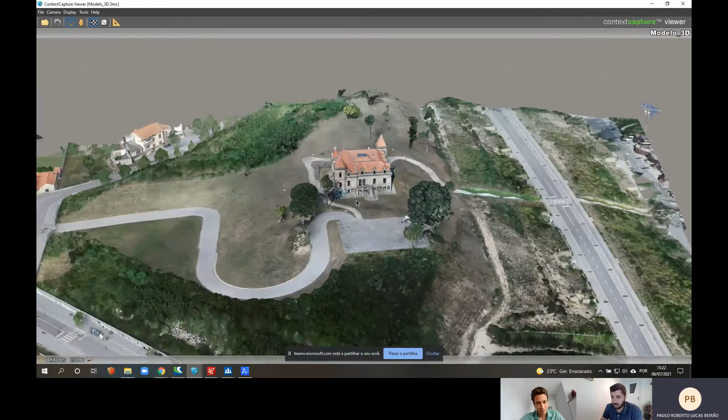Okay, now you see my monitor? Yeah, we can see it now. So this is Palácio de Gaia, right? This is the Palácio, yes. And where is this exactly in Portugal? It's at the south of Porto. Oh okay, nice area.

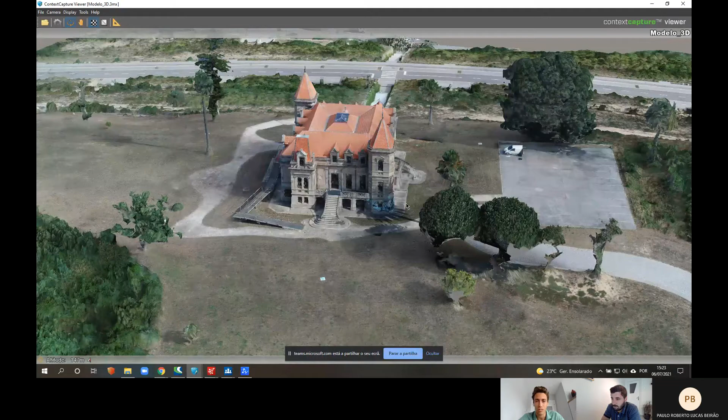We've been saying that the capturing process was really important and really hard to learn ourselves. What was the capturing process here? How did you apply it, and what resources did you use?

So here first I made an automatic flight with the drone of the entire area. I put here in the ground some control points, ground control points.

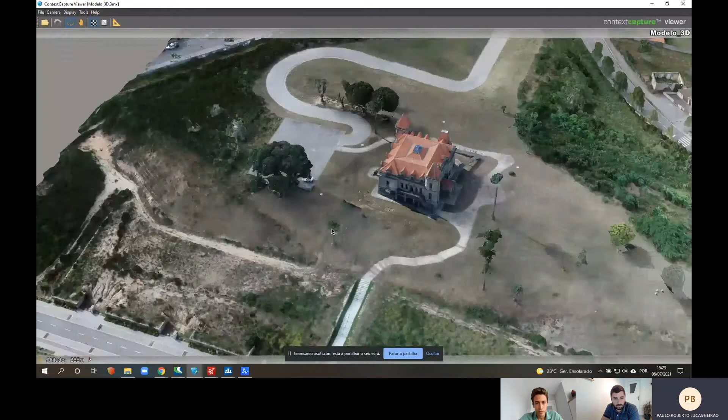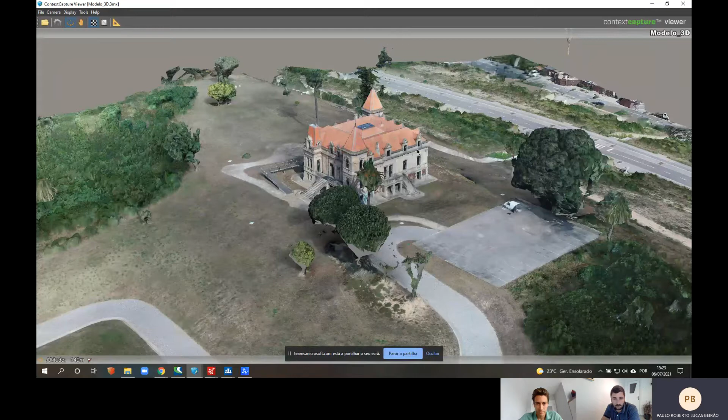So you use GPS technology to georeference this model? Yes, yes, GNSS, I use it to georeference this. So I made an automatic flight at 30 meters high.

And then I made some manual flights around the palace, to catch more details probably. And then I took more pictures from the ground with an iPad Pro, with a tablet.

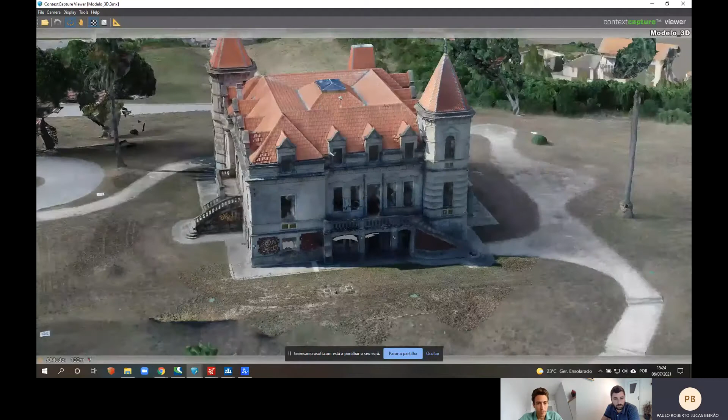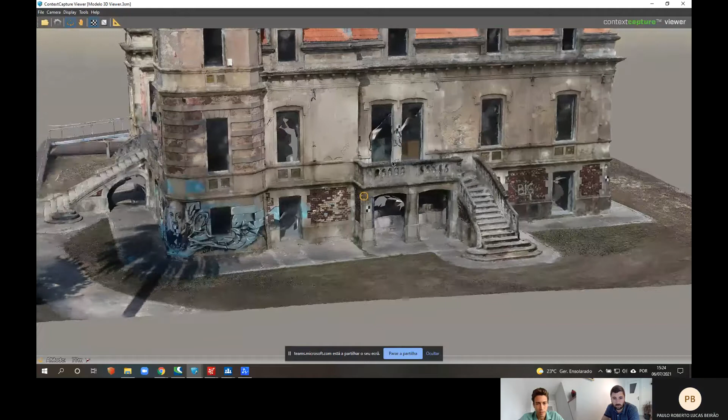Okay, so the outside was only with photography. And then I cut it and created this model. So this is the result of 3 different techniques: an automated flight, manual flight, and photographs from the ground using a tablet iPad, right? Yeah.

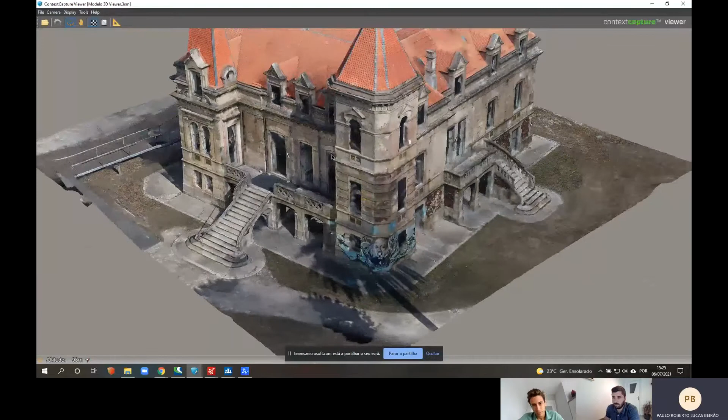We can see your precise technique, I can see many targets around the building, even on the walls. Well, in this model I don't use QR codes, I use only this normal target. I have here another one to georeference it, because then I use the laser scanner to measure the interior, the inside.

So to georeference the point cloud, I start from the outside and then go inside, measuring everything, and I can show you.

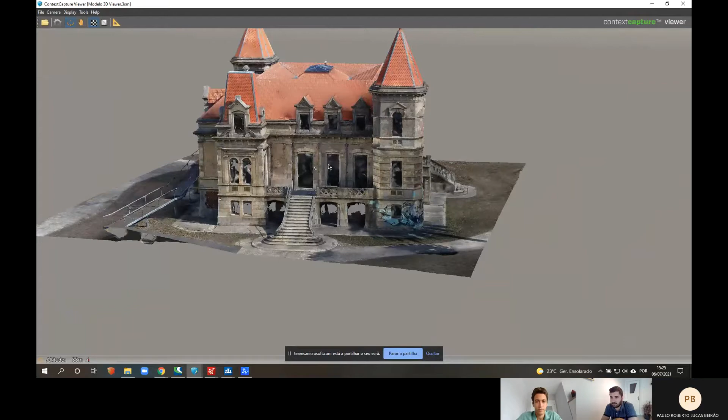So what was the purpose of this work? Was it for architecture, or can you show us the kind of deliverables? Yes, this was for an architecture project to become a hotel, and they want to preserve this aspect of the building, the facade of the building. Yes, they want to preserve it.

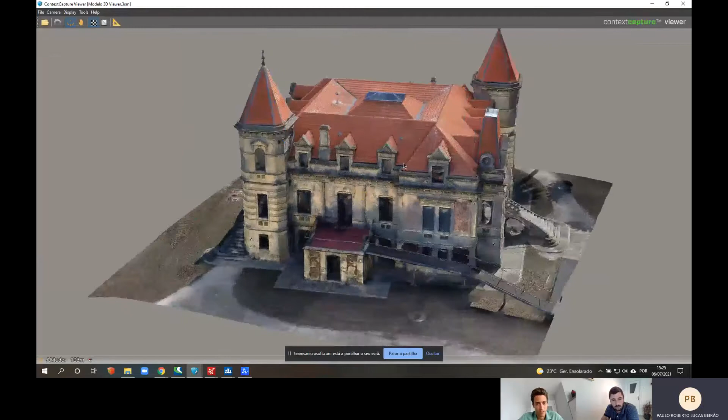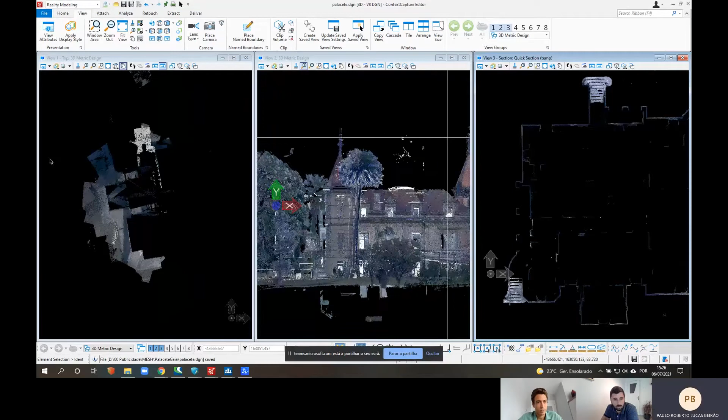So then I made the interior, yeah, I can show you right here in CC Editor. Okay, this is in ContextCapture Editor then, yeah.

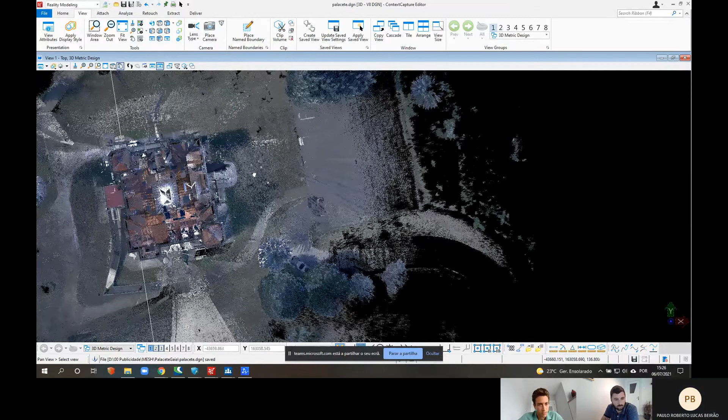So this is the point cloud. And then using the point cloud, you extracted the floor plans.

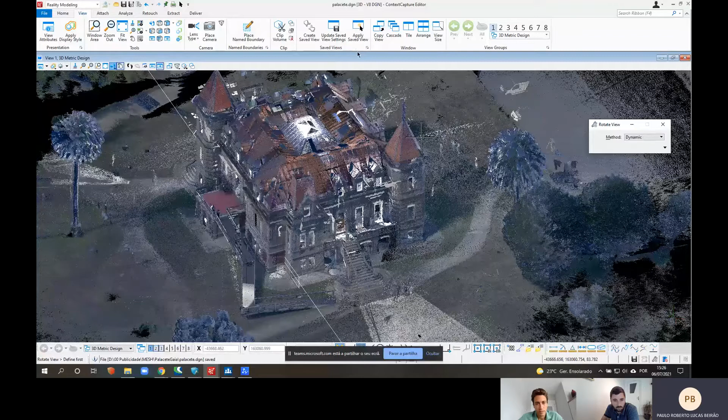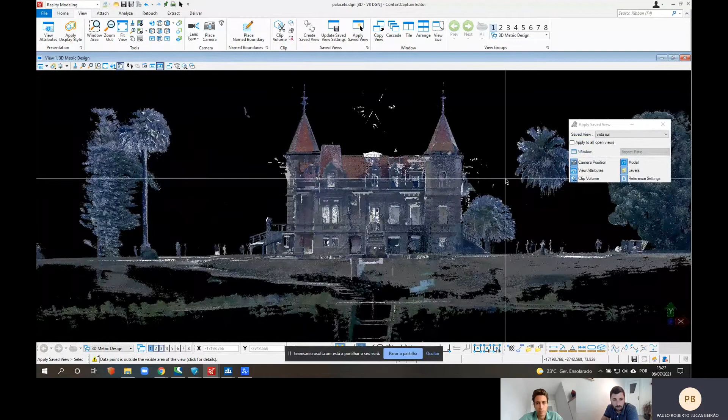I have here some saved views to show you, where we have combined as well the laser for inside. That's really good work. Then you can draw with RGB, the color, or with intensity. It depends on the person, some people like to draw with intensity.

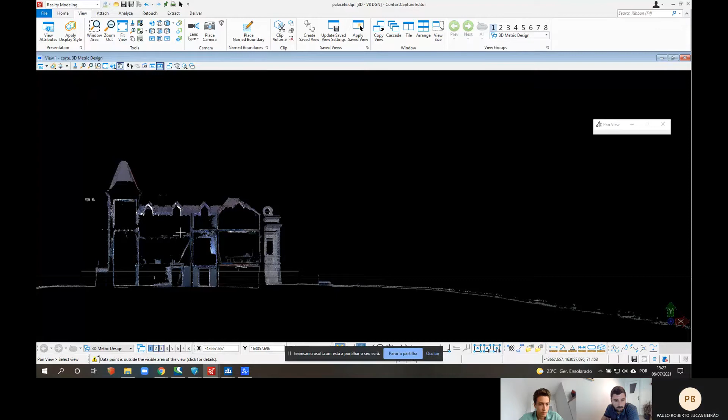So you used cross sections to draw not only the facades but also the interiors. Yes, for the plan, I can show you here. For example this, you have here the interior, with the sections, yeah, a section.

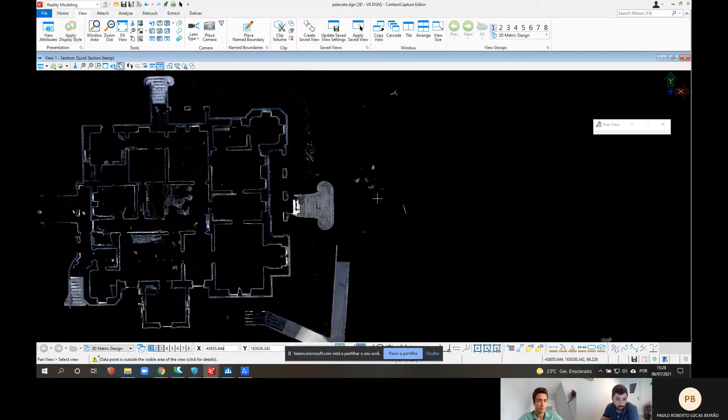And you can see it horizontally, for example like here. That's fantastic. So this is very useful for architects that need this kind of deliverables for their studies. It's really good to see the type of job that you are doing. You draw everything. Yeah, exactly.

And how long was the scanning process of the inside, do you remember? It doesn't look quite fast. Inside I took about 2 days, 2 entire days. All the job outside in the street, plus the inside, I took 5 days.

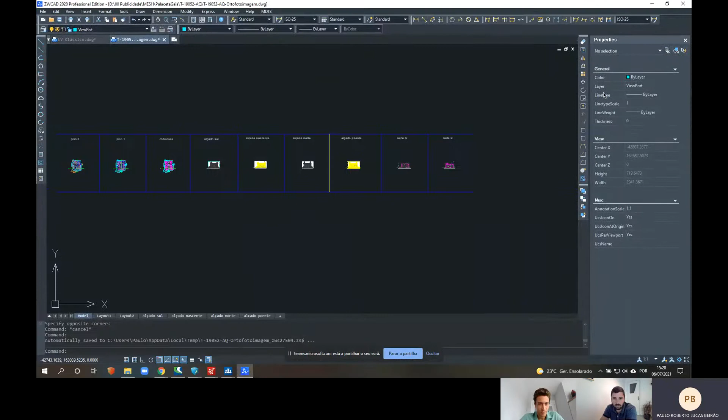And a few more days in the office, about 2 or 3 weeks drawing. Yeah, totally. And do you have the deliverables, can you show the final drawings? I can show you here, and then we give the deliverables in AutoCAD. Wow, okay, you can see this.

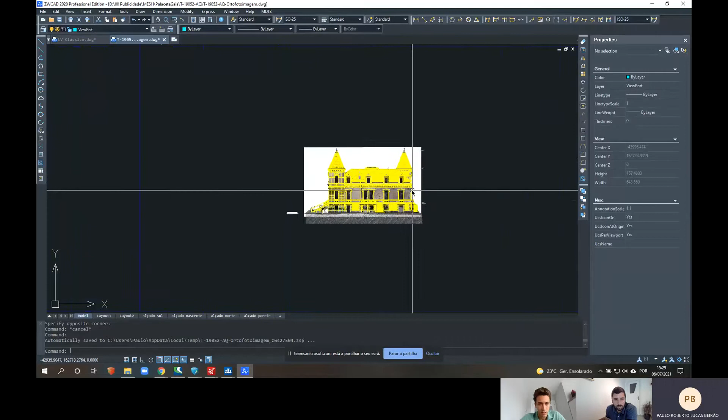Have the first floor, for example, the second one, the terrace. Then you have the outside walls, the facade. That's fantastic work. This is very detailed, we have the section here. See, it's gray here, to have the context, real context around it. You see the facade.

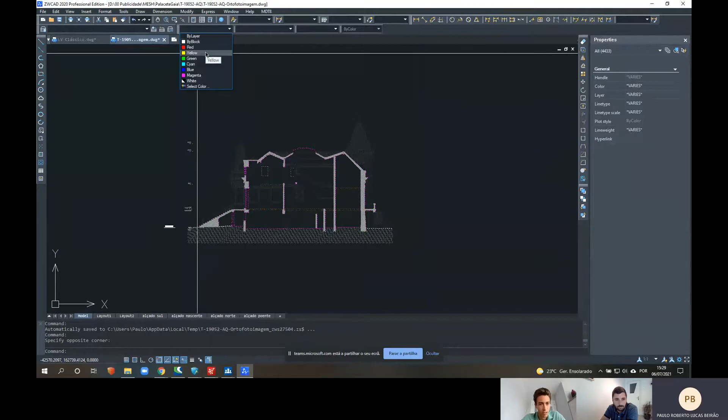The section and the other section, so you can produce every drawing. This is really valuable. Indeed, so I would say that with these drawings, all the planning stage for construction will be perfectly handleable from the architects and civil engineers, right? What do you think was the value or the advantages of doing it with this combination of photogrammetry and laser scanning rather than the traditional topography methods we are used to?

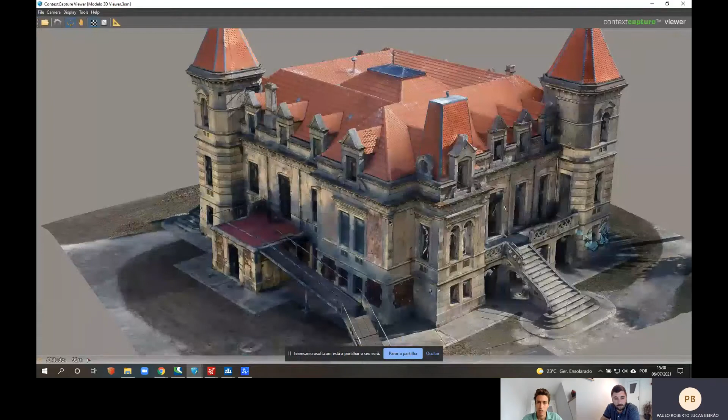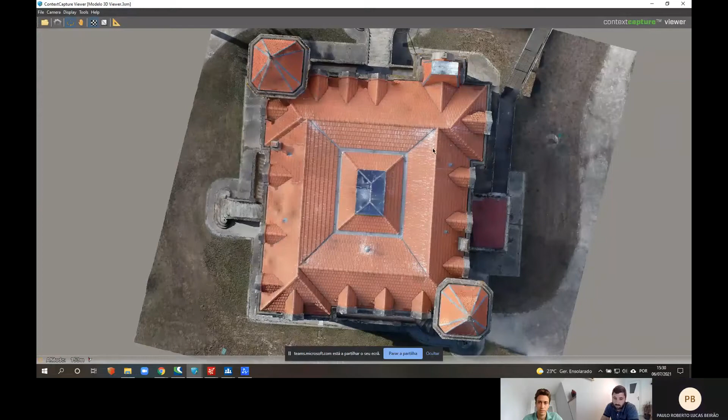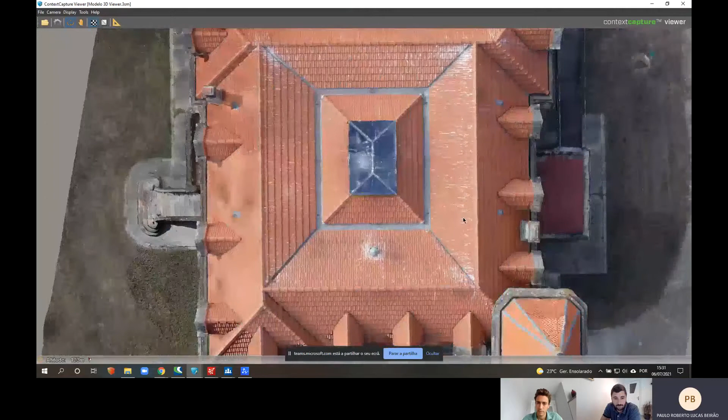Well, you have here, for example, with the traditional surveying, how do you draw these things? So all these details you could capture with the reality mesh. And I would say that in the field, instead of 4 or 5 days to collect all this data with a conventional topography survey, you would take at least 2 or 3 weeks or even more, right? Yes, and the work is not so good, because how do you measure this with the classic topography?

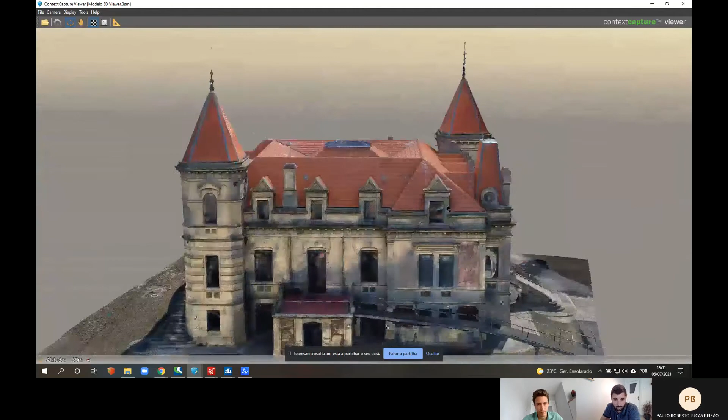So for you, this innovation of workflow in your company was very good, and you are now profiting and taking advantage of this new workflow. Yes, absolutely, that's a fantastic model. This is, I would say, the new way of surveying and capturing all these kinds of details, especially for heritage, where this type of detail is so big.

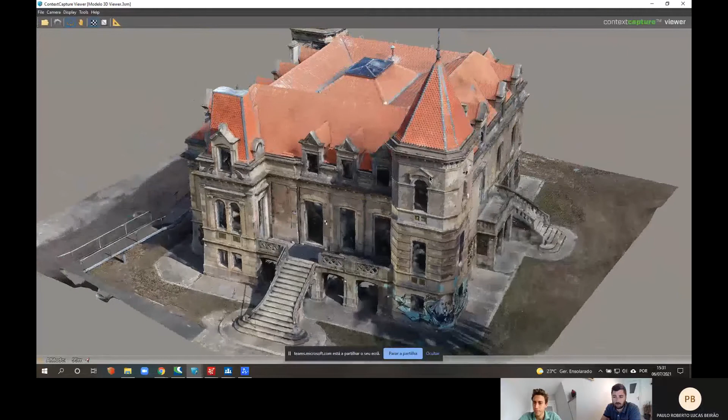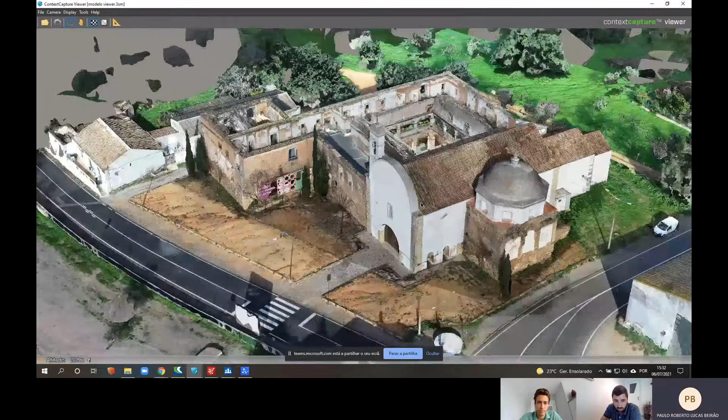Talking about the details, can you show us the other model? I think it's from a convent. And you could also tell us what kind of techniques you used in the field to capture this great model. The convent is this one here. I also made an automatic flight at 30 meters high, and then I made a manual flight also around and from the ground too with the iPad. So in the exterior, in the outside, I did the same technique.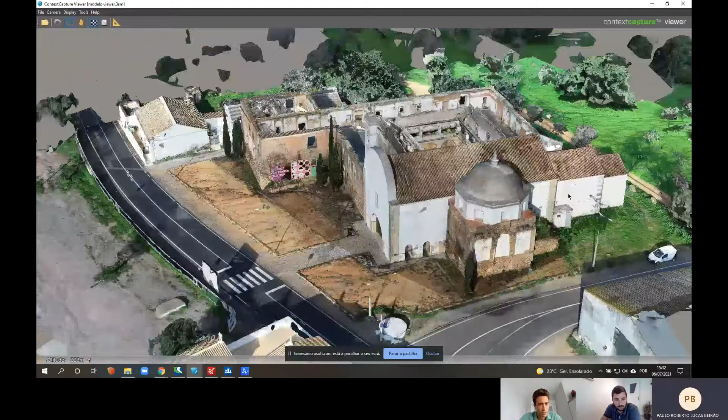I used the GNSS to georeference the model. The big difference here is that in the interior I started to use QR codes. Because first I made the outside in one 3D mesh, and then I made a second 3D mesh only of this part, so I had to merge those meshes to bring into a unique model. Yes, then I merged the two meshes and the QR codes helped me a lot.

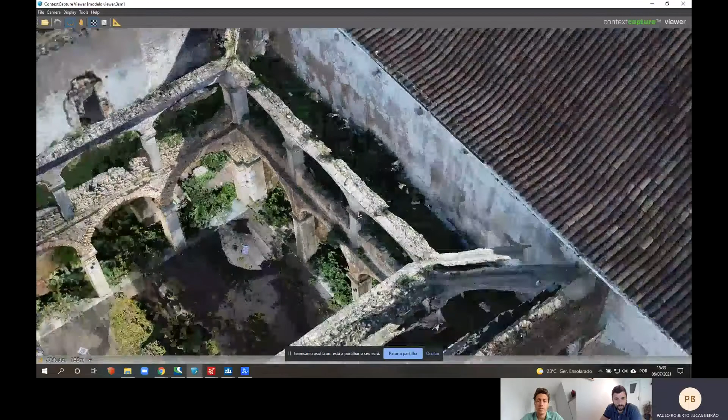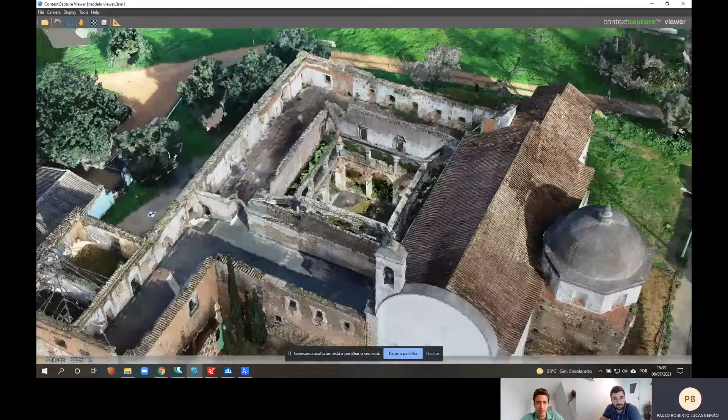Was it hard to combine them from multiple devices, did you use laser scan? No, here it's only photography, just combining the inside and outside with the QR codes. Was it hard? Yeah, a little bit. I took in total 1,200 photos of everything, and only inside here I have about 500, only inside of this part. And it was captured on the same day, or in different days?

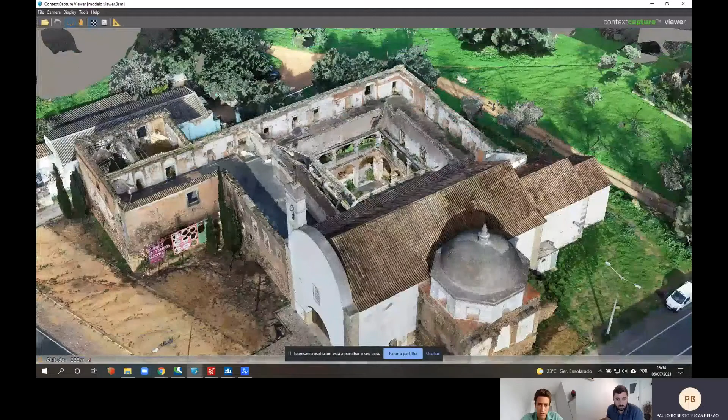We can maybe see a difference of sun, but it's not really noticeable. The outside I did in December, and this here I did in last March. Even so, we don't have a big difference, something that can be really noticeable here. So I think it was a really good merge between those models, the QR codes are really good.

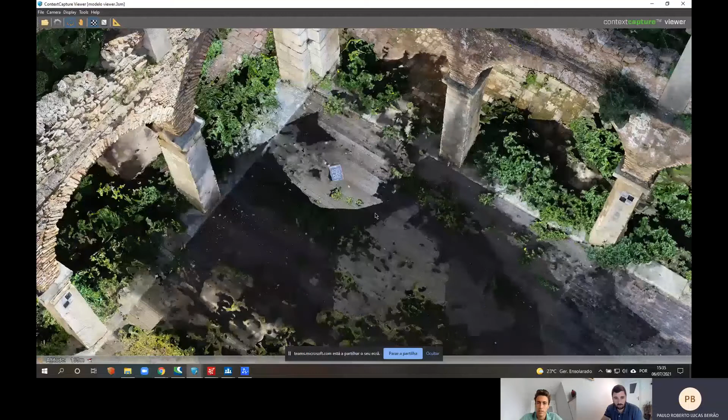So do you have to do it manually, merge them together in ContextCapture, both the inside and outside? Manually, only with this kind of targets, because of the QR codes. And then in ContextCapture you can specify which QR codes you want to use, because one is for tie points, others are for the axis X or Y, for scale, for example. You have many types of QR codes, and here I used it for scale, tie points, and axis constraints.

Good to know. And I don't know if this is a current project, what is the purpose of this job, of this project? Well, this job is to analyze the sequence of construction of this convent, for historical analysis, to analyze what happened since its foundation, because this kind of building passed through some earthquakes.

Later on, with the extinction of the religious order, this church was closed and sold to a leather factory. So they changed some things. They opened some doors in the wall, as you can see here. You can see some difference here. We can see where you have passed with the iPhone, probably, right?

Yeah. And you can see some difference here. So we study this kind of difference in the stones. You have an old door here, you see. Definitely. So the purpose is the history of the construction, destruction, and reconstruction of the building.

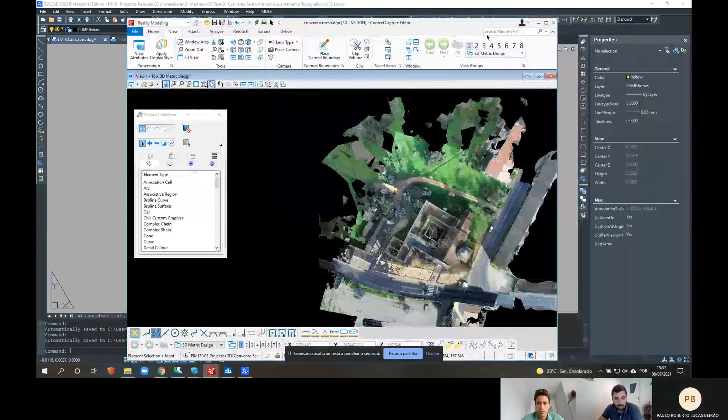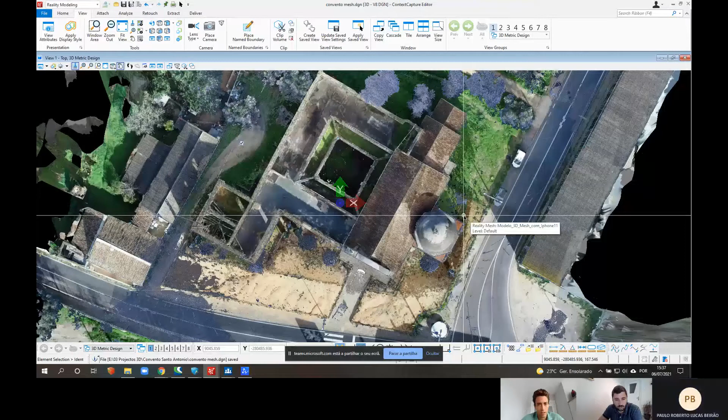in the editor, what can we make here? So here in editor, I have the 3D mesh and the point cloud. Oh, you used also a laser scanning device. Yes, because in some places here it's not possible with photography. So I made it with laser scanning.

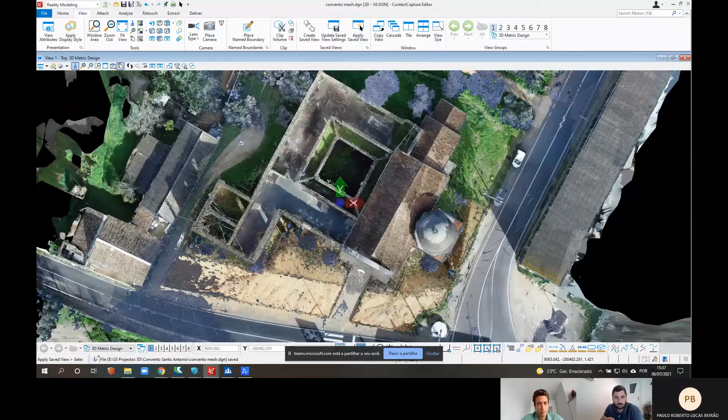And you used both point cloud and photography to create the 3D mesh. Yes. So I have here, for example... see? Okay, with sections, yeah. And the interior here. Okay, you see here? This is the point cloud inside the building.

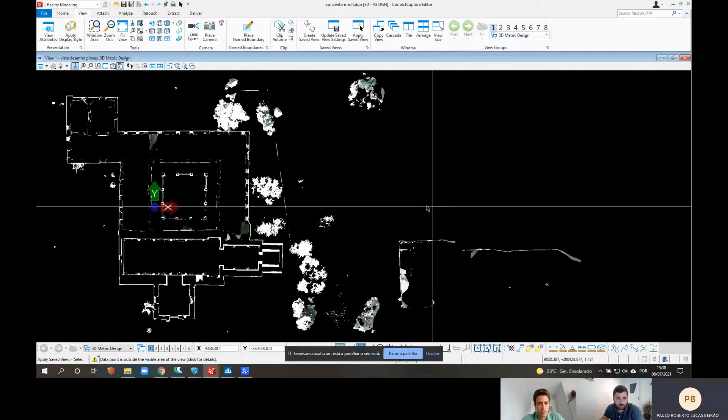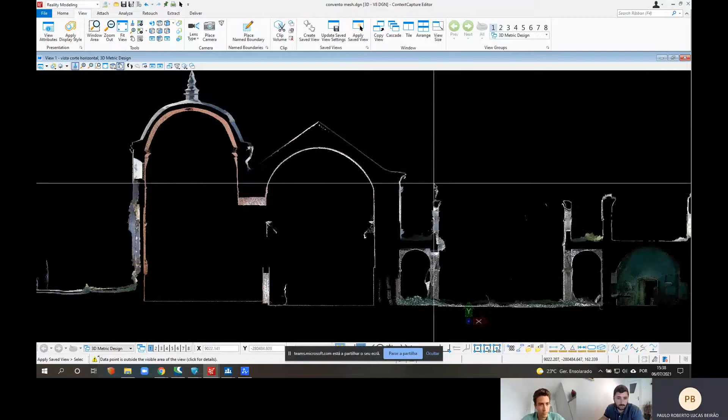And you also used this for 2D plans and architecture designs. We have here a section. Okay. So this is the type of outcome that you can use for high precision drawings.

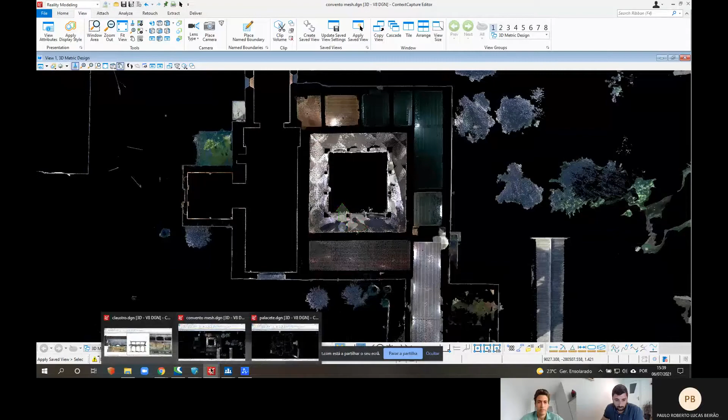And I would say that you don't need classical topography for that. You can rely on this and have a precise deliverable for your customer. I have here, for example, this wall. And then you can draw here. Okay, you make photogrammetry with this.

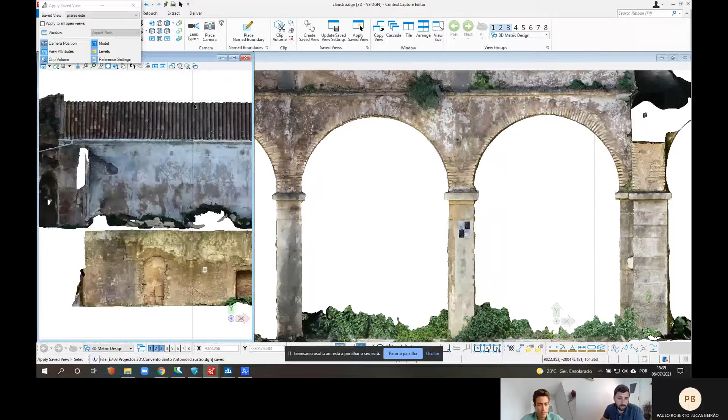And beyond the drawings, you can also perform heritage analysis for historical studies. And then I produce this, to identify the different layers of construction.

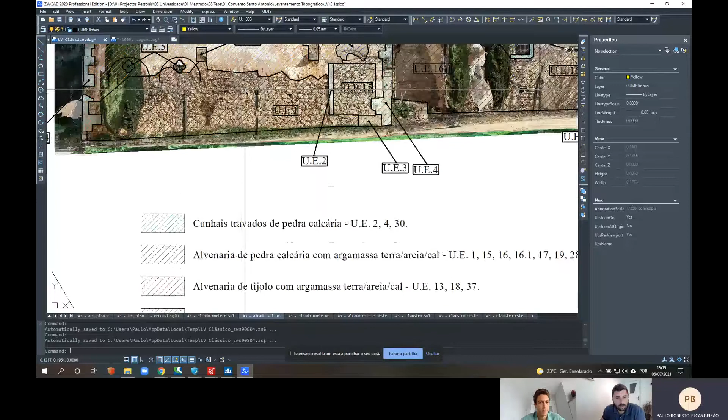Yeah, great. And then I write here what kind of stone and concrete. So along the years, you identify the different construction techniques or materials that were used in this convent. And as you can see, you have great definition with the orthos.

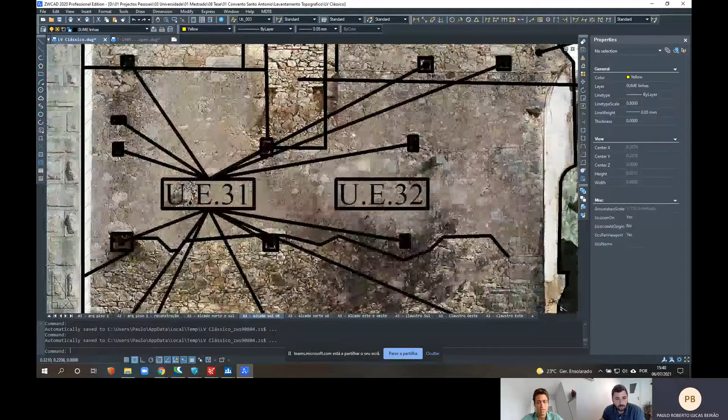Yes, definitely. I feel it's very important in this type of activity, the reality modeling. In heritage, we cannot trust pure design techniques. So we need the real state of our infrastructure.

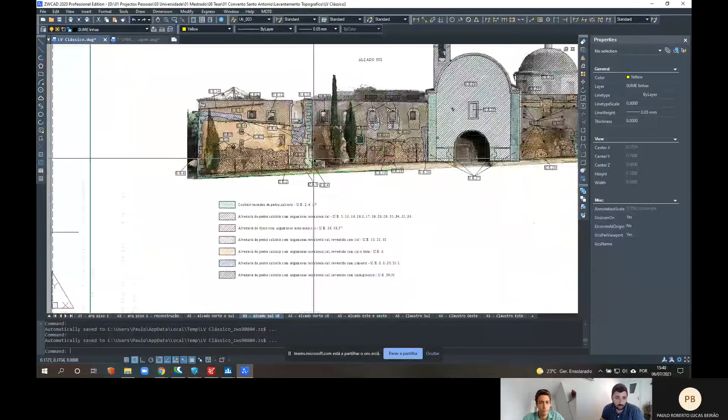And also I would say the visualizing part of this project is very important. If you don't have this type of detail and quality, it would be difficult to identify these different stages and different materials, right?

This job is not done yet. I'm still working on it. I have everything here. Okay, so you are mixing a conventional 2D plan for topography with heritage analysis for further studies.

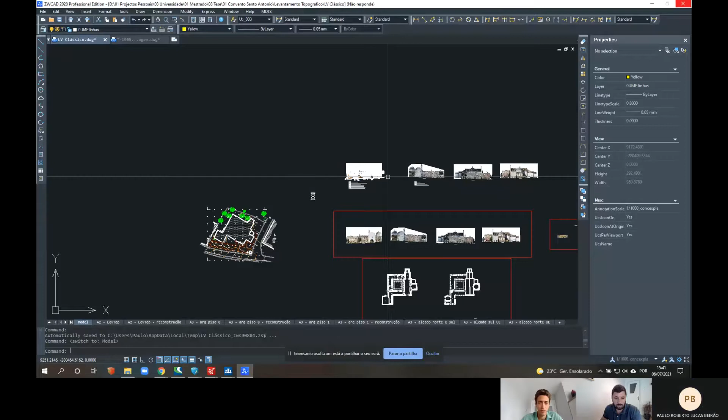Yes, pretty simple workflow it seems. I have everything here together - the classic survey with total station and the GNSS.

Okay, also combining - did you use some data from the photogrammetry survey? I use it, I have here the ortho. So you combined the two techniques to have this 2D model.

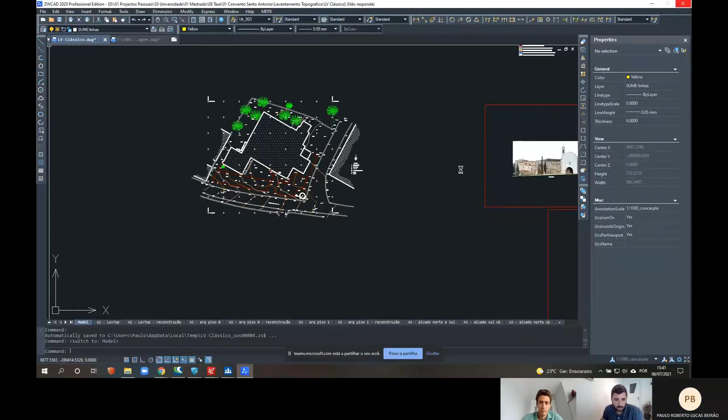Yes, this 2D plan. For me, it's perfect to have everything together. As you can see, I have here an ortho with the classic survey.

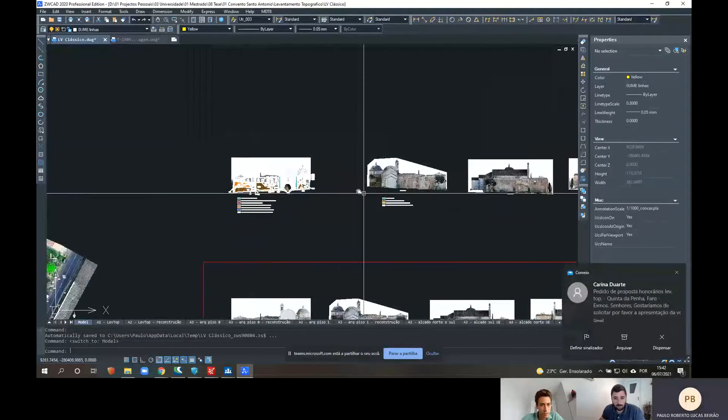Yeah, yes, this is a very complete job. This is the part that I show in the layout, and I have the other ones here already prepared to do the same thing. Okay, and it's not quite fast to do it manually, right?

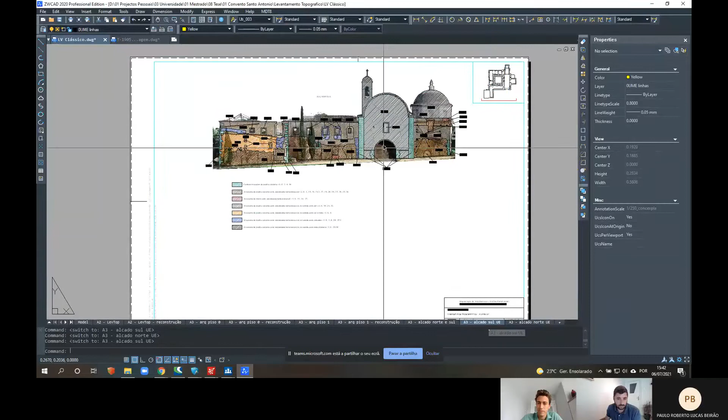All of these section details and analysis, yeah. Well, I think there's a pretty good job here and very complete. I think this is one of the first times that I can see two different techniques.

I would say even three different techniques - a classical survey, photogrammetry survey, and even using multiple sensors. What kind of suggestions can you give us, or to our users, about the use of different imaging or topography equipment with or without laser scanning? What are your advices to people who want to improve their workflow?

Well, the best is to create a job with everything, but if you only have access to photography, for example, just try it with a good mobile phone. This kind of work only gets results with lots of training. You need a lot of training to get good results, and it takes lots of time and patience - be very patient.

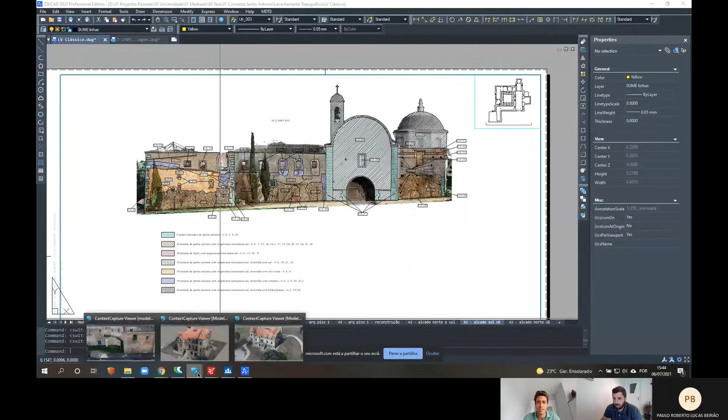So the best advice is to be patient and train a lot. Okay. Because after that, the software will help anyway. So if you have a good capture, you can perform everything after the field. Mm-hmm. And so we talk about having this hard work in capturing and putting a lot of patience and emphasis on our capturing process and applying the best techniques that we can. We talk about improving on detail and time, especially on the time capturing. We said like 5 days compared to a couple of weeks of conventional surveying.

And what about the costs? Do you think there will be a difference in cost using photogrammetry and laser scanning compared to conventional surveying? You get a better job with photogrammetry and laser scanning. You make a better job for your client. With the classic surveying, you are a bit limited. So I would say that having more data from the field using this kind of techniques, you can deliver a better job. A better job, yes.

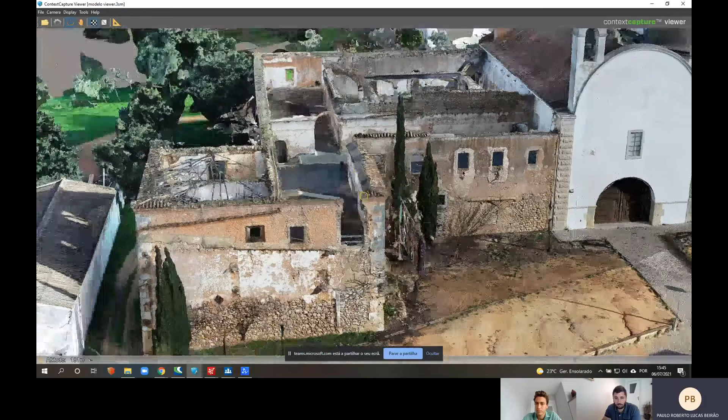Exactly. And probably also, talking about costs, it will avoid you going back to the field if you have doubts or if you need to double check something. Yes, with this model, for example, I don't need to go every day to the convent to see the walls. I see everything here. You just need to open the model and clarify your doubts. Totally. Maybe even the next step will be to put this model on some virtual lenses, HoloLens, for example, to visualize this model directly from our office, feeling that we are there on the site, right? Do the analysis. Yes.

Well, so the big advantage is that I spent some days working on this, but then I don't need to go to the convento again. Exactly. Like the palace, for example, the palace is in Porto. I live in the south of Portugal. So I spent 1 week in Porto measuring, and the rest of the time was here in the Algarve in the office. So it's also very important in terms of cost saving and saving some efforts from your side when something is forgotten in the field. Yeah, that's the most important value for me.

So we talked here about good collection on the field, but also having good training and good knowledge, because if we have the data available, we can then model everything depending on our needs, and I would even say depending on our imagination. We see that you started everything from scratch and you learned everything by yourself. So Ruben, can you tell us a little bit more about the reality modeling worksuite and the training that is included, for some of our users to follow the learning path that Paulo had to do by himself?

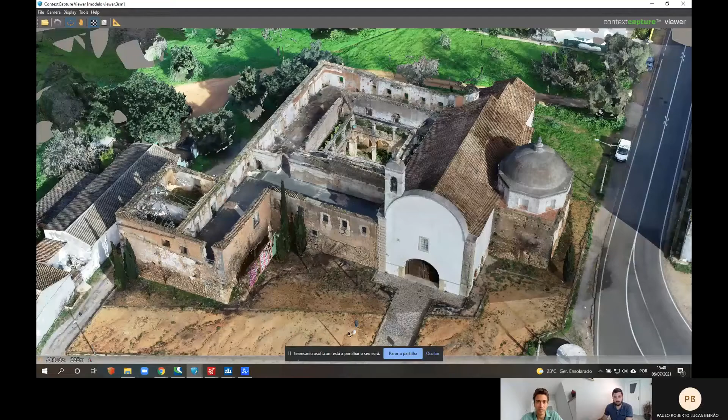Well, it's really good to see that now our users have some help from our side to start learning and doing the same brilliant jobs that Paulo is doing. This amazing job he is doing really shows that it is possible to go from a conventional survey methodology to a new reality modeling strategy, not only to speed workflows, but also to save time and costs, because that is what really matters nowadays. Totally, I think the two models and two workflows you showed were really concise and precise.